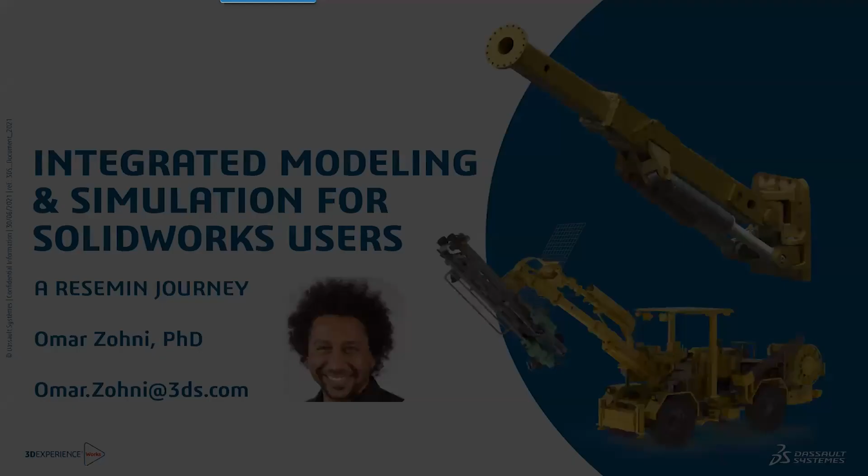Okay, so the company that we're going to talk about is called Resemin. What we're going to start with is I'm going to talk a little bit about Resemin, what their struggles were, how they were currently using simulation. I'll talk a little bit about Resemin and their adoption of the 3D experience platform, why they adopted it, what they thought was important, and then the journey of getting them onto the platform and using it. Then we'll wrap up with any Q&A or some calls to action.

So Resemin is a company that started in 1989. They are based in South America, actually in Peru. Their niche, their specialty, is basically underground mining, specifically they wanted to make compact underground mining vehicles that were affordable. So you can see now they're in over 17 countries. They make a handful of products. They're quite successful. So let's talk a little bit more about the company.

So again, they started in 1989. Their first product that they launched was this product called the Raptor. It was a real milestone for them. It was a very affordable solution for many underground mining companies, right? So that was back in 2001. They first sold the Raptor to Zambia, in Africa. They entered the South American market in Chile.

They created what's called this bolter tool, which can actually cut through rocks and bolts, so the small bolter 99 and the bolter 99 were really national inside of Peru, as well as international hits for them. So they started doing these drilling rigs. They entered the Mexican market. They really started to consolidate in the African market.

I'm not going to talk through all of these, but Muki was another real game changer for them because it was the smallest underground mining rig at the time—I think it actually might still be. The Muki actually spread to 5 different continents. So they started to get a real worldwide audience and a worldwide customer base, right?

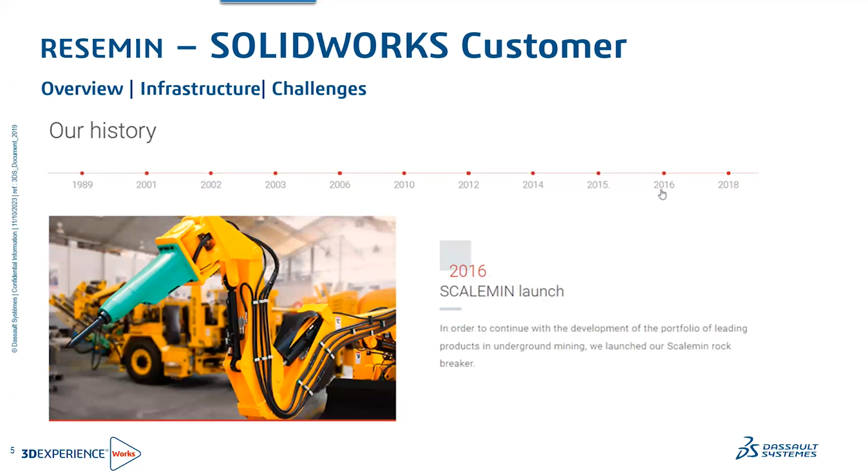South Africa. This Scalemin is a product that we're actually going to be looking at a little bit. They actually entered the Russian market in 2018. I know Russia's a bit tricky to discuss right now, but back in 2018, it wasn't. Hopefully this video is coming through for you guys.

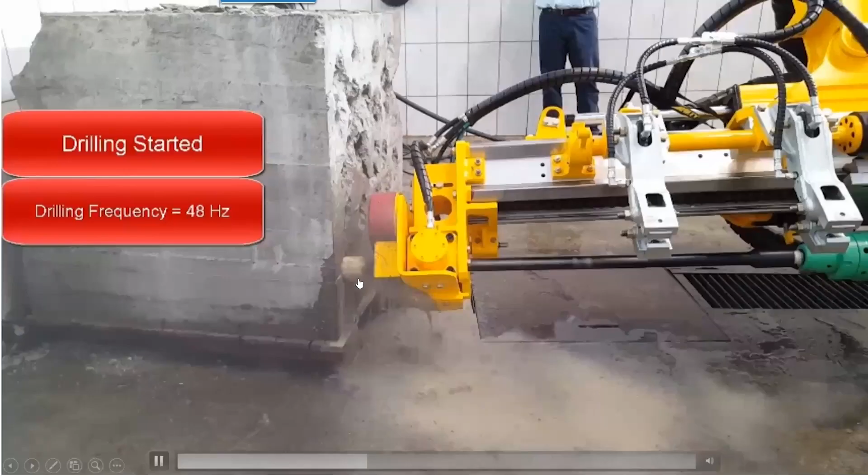So you can see this is that last product that we talked about, right? So you can see drilling through rock from an analysis standpoint. This is a pretty complicated problem, right? You have vibration concerns, you have significant loads—it's a very large load. You have vibration concerns, you have cooling concerns. You can see there's a whole bunch of fluid that's flowing through here in order to keep the tooltip cool.

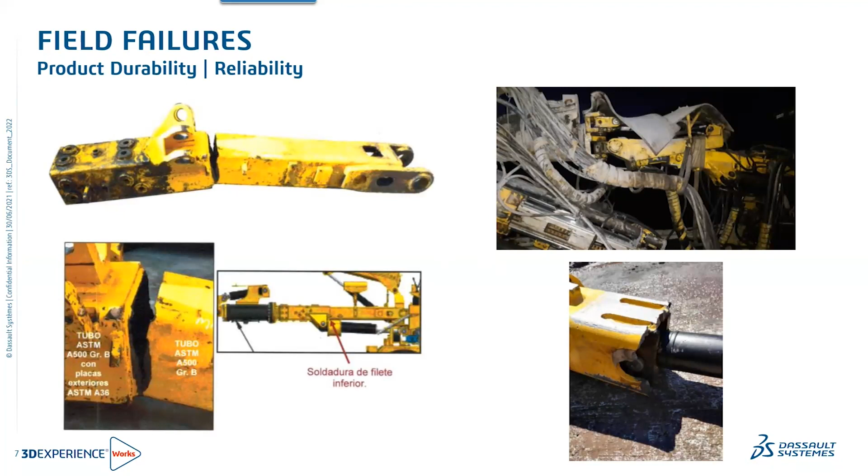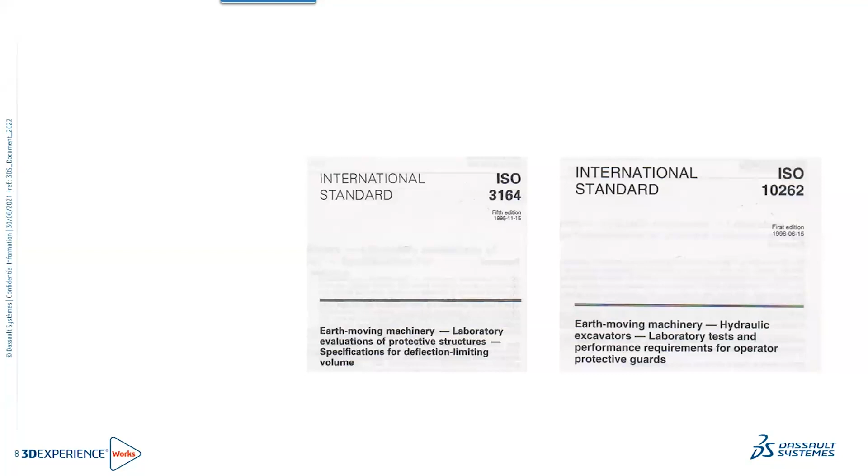Relatively simple kind of geometry, but a pretty complicated type of analysis, based on the criteria and the needs for this specific company. So what Resemin was seeing was a lot of field failures after they built their products. They had a real reliability issue—they were getting all of these cracks after utilization and after pretty low cycle utilization. It wasn't like the thing had been in the field for 5 or 10 years; it started to fail pretty early on. That was one issue they were very concerned about, those field failures, and I'll talk a little bit about why they were concerned about those field failures in a couple slides.

They also had a couple industry standards, and depending on the country you're in, the standard could be a little different. So they had what's called falling object protection - this is the roof of a vehicle, and someone is sitting underneath here. Different countries have different criteria for the falling object: the height it could be falling from, as well as the amount of energy that falling object could impart on the roof.

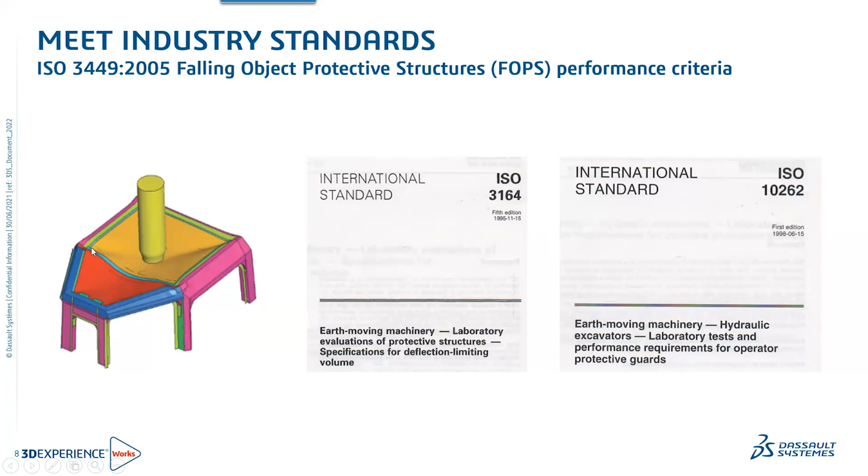They also had something called rollover protection, which is basically the vehicle being hit from the side and protecting the user. Obviously there's going to be somebody sitting inside this canopy, and you want to make sure they're safe.

So when we first started talking to Resemin, this is what they told us - this was kind of their current configuration at the time. They had about 20 Solidworks licenses that they were doing their CAD design with. Resemin was a really strong Solidworks customer; they had been using us since basically their introduction. So 20 users doing CAD design.

They had a couple users that were using SolidWorks simulation for really basic structural analysis, linear dynamics, like frequency analysis. And then they had a third-party tool that they were using for complex analysis - more advanced fatigue, multi-body dynamics. So they were either using that third-party tool or they were contracting that work out.

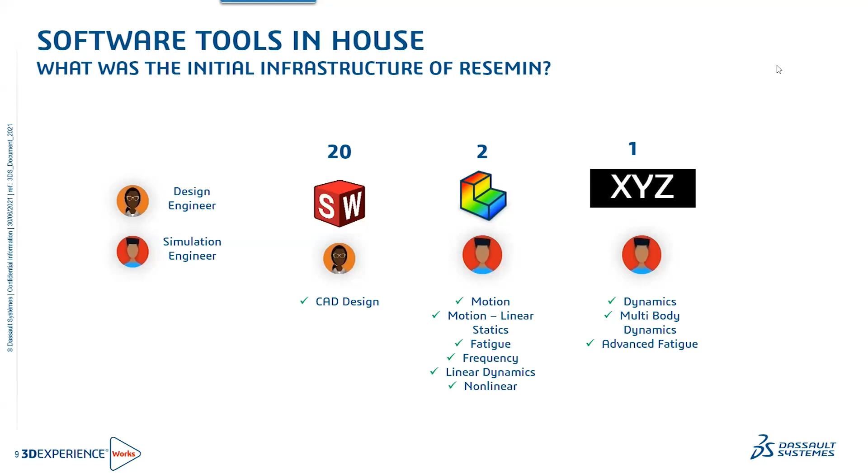Now, in addition to that, they also had two different kinds of product development cycles. One of their development cycles would be for new products. They would design it, they would simulate it, then they would manufacture, and they were seeing that they were building about 10 prototypes a year, and each prototype was taking about a month. So that was when they had new product launches, and there wasn't a lot of simulation really driving the design process.

So everybody was kind of working in a separate bucket. The designers would come up with the design, they would simulate it. If they saw some glaring problems, they might kick it back to the designer. But this wasn't really a seamless and bi-directional process where simulation was kind of driving their design. So there were a lot of prototypes that they built that were just not good designs, because they weren't doing enough simulation, and they realized that.

They also had an aftermarket process. So they would manufacture a design, then there would be a field failure. They would do some very advanced simulation, either in-house using that third-party tool, or they would consult it out. Then they would do a redesign, and then they would manufacture the redesign.

Now, here's the thing Resemin did that I don't know a lot of other companies do. First, they would send a designer out into the field to try to figure out and rectify what the problem was. But they would reimburse the company for the time they lost revenue for not being able to use the tool. So they had to turn these around really quickly because Resemin was paying. You can imagine for a company, there are huge costs associated with reimbursing a customer for not being able to use the tool - warranty costs, and having to figure out exactly why that thing is failing in a very short time.

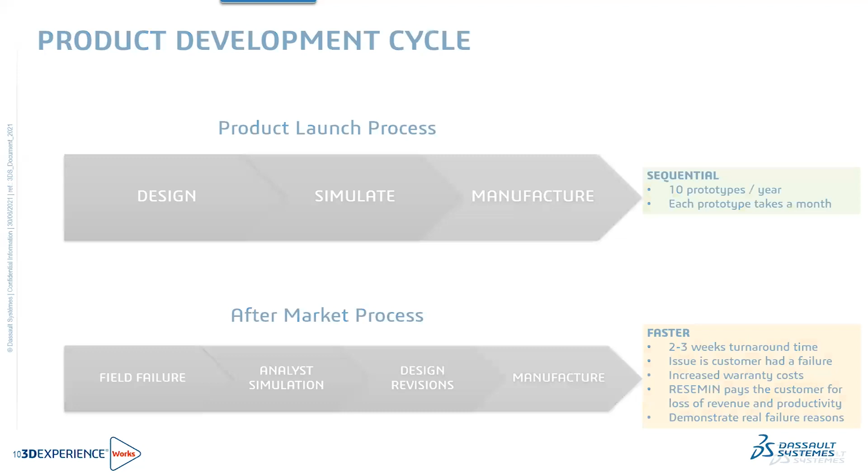So that's kind of where they were, and that's when they reached out to us and were talking to us. They're, again, a really close customer of ours. They were talking to us about some of their challenges, so we decided to talk a little bit with them about the 3D Experience platform.

Now, I know you guys are probably exhausted of hearing about the 3D Experience platform. I'm going to give a real brief summary about how I think about it. I'm not going to spend a lot of time here.

Dassault Systèmes is basically a conglomeration or a group of a bunch of different brands. Everybody knows SolidWorks, that's one of the brands. CATIA is another brand. Simulia is the brand that's responsible for developing all of the analysis tools that Dassault Systèmes has, including Abaqus, including SolidWorks simulation. Actually, the Abaqus developers are now responsible for developing SolidWorks simulation.

The 3D Experience platform basically brings together the best of all of the brands at Dassault Systèmes into one workbench, or one platform, that you can start leveraging some of these different brands.

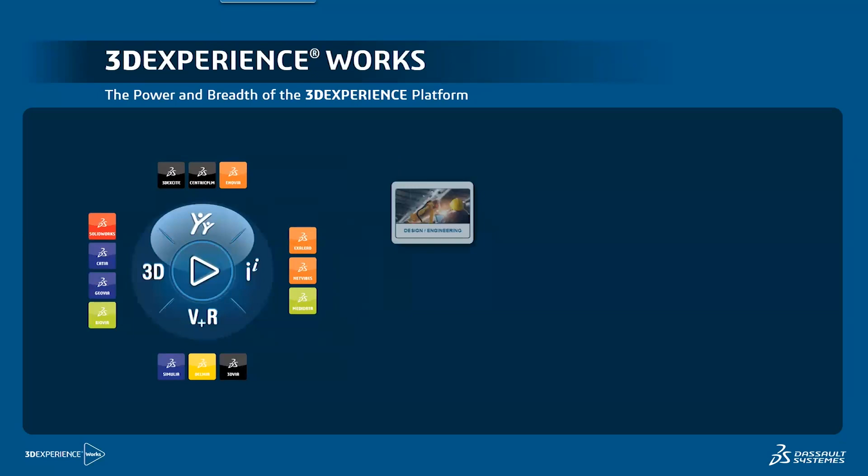So the way I think about it, and this is a very simplistic way, is everybody uses an iPhone, or everybody at least knows how an iPhone works. The iPhone operating system is kind of similar to the 3D Experience platform. And then depending on what you want to do, you have different apps that you can add to the iPhone, your iOS. That's kind of how the 3D Experience platform works.

Now, there are apps for design and engineering and simulation, which is the space that I play in most. There's also stuff for marketing and sales, product management. There's a PLM that's kind of built in. There's stuff for governance, and there's stuff for manufacturing and production via the Delmia brand. But what we're going to focus on is design, engineering and simulation, and that's the venture between the SolidWorks brand and the Simulia brand.

If you guys have not heard of Simulia, Simulia is the brand responsible for all of the simulation tools that are developed by Dassault Systèmes.

So I'll give you guys a little bit of background. I don't like talking about myself because this is not about me, but I did my undergrad at the University of Pittsburgh, which happens to be where ANSYS is based. So I co-op with ANSYS, and then after I finished my PhD, I actually went to work for ANSYS for a little bit.

When I transitioned over to SolidWorks, one of the things that was frustrating for me was there are a lot of problems at SolidWorks, and SolidWorks simulation is a great tool, but there are a lot of problems where it hits its limits. The nice thing now about starting to work with Abaqus and the Simulia brand is across different physics, there's very few types of analyses that the Simulia brand is not able to solve.

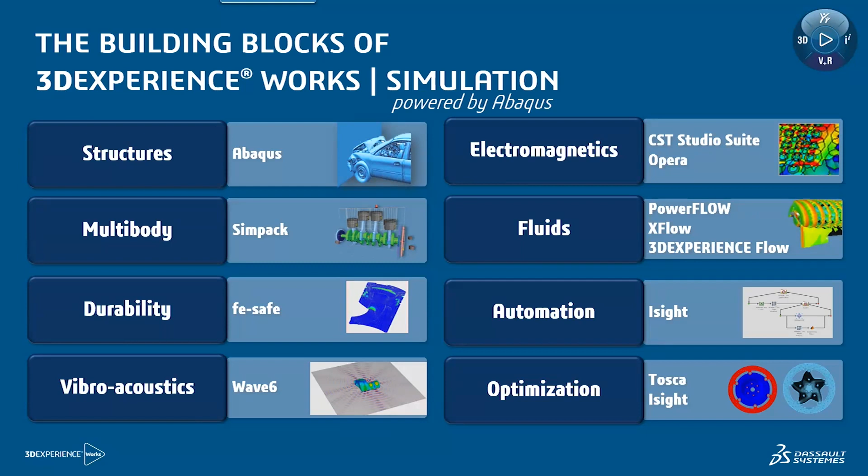So now with the 3D Experience platform and a lot of the things that are going on with 3D Experience Works and the simulation tools on the 3D Experience platform, it's a really exciting time to be a SolidWorks user because you're going to be able to be exposed to a lot of these different tools all inside the Dassault family, all under the Dassault umbrella.

So again, a little bit about the 3D Experience platform. I know you guys are exhausted of it, but some of the things that I think are important, especially for simulation users, it's integrated with SolidWorks. We realize that SolidWorks is kind of the sun that everything else revolves around. So if we can't effectively leverage your SolidWorks geometry, no solution that we provide is going to be useful for you. So it's integrated.

It's also scalable. So whether you're doing very, very basic, simple linear analysis all the way up to explicit dynamics or damage modeling or cohesive zone modeling, there is a solution for you.

It's on the cloud. So if you want to leverage high performance computing right out of the box, you can run most of the tools on at least 8 cores. That's local or on the cloud, but there are ways that you can scale up and run on 18, 36, all the way up to, I think, 288 cores if you've got really, really complicated electromagnetics or computational fluid dynamics problems. So it's on cloud and scalable, and it's got that SolidWorks DNA.

So it does have an assistant panel that kind of guides you through an analysis. We realize a lot of our SolidWorks users are not doing analysis every day, so whatever tools we give them, the learning curve has to be not very painful.

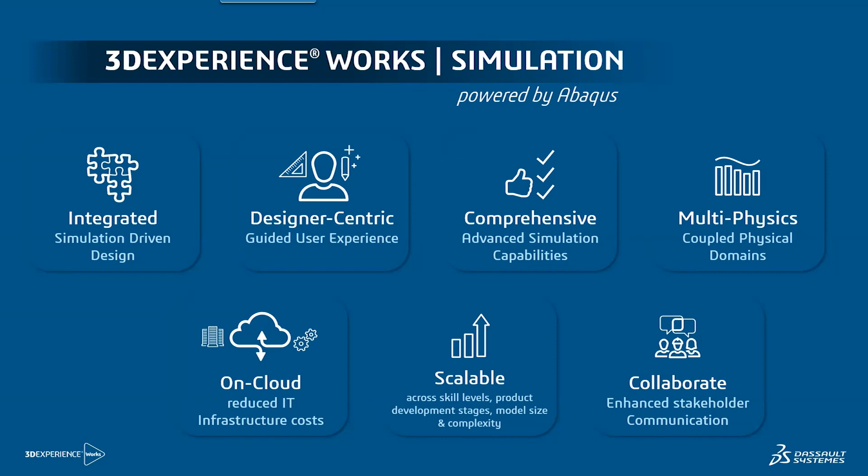We're going to talk mostly about Abaqus today, and the Abaqus solver. So just a brief description of what Abaqus is. Hopefully you guys have heard of it.

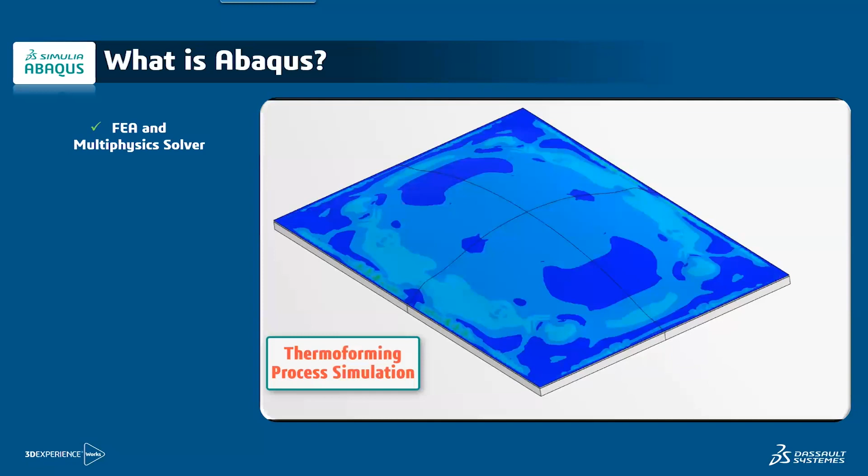Abaqus - and again, I came from ANSYS, so my job here is never to talk down about the competition - but Abaqus is kind of a best-in-class finite element analysis solver as well as multi-physics solver. It has capabilities for smooth particle hydrodynamics, acoustics, piezoelectric, piezoresistive, and thermal analysis. Where Abaqus really shines is complicated material models as well as ill-conditioned contact problems.

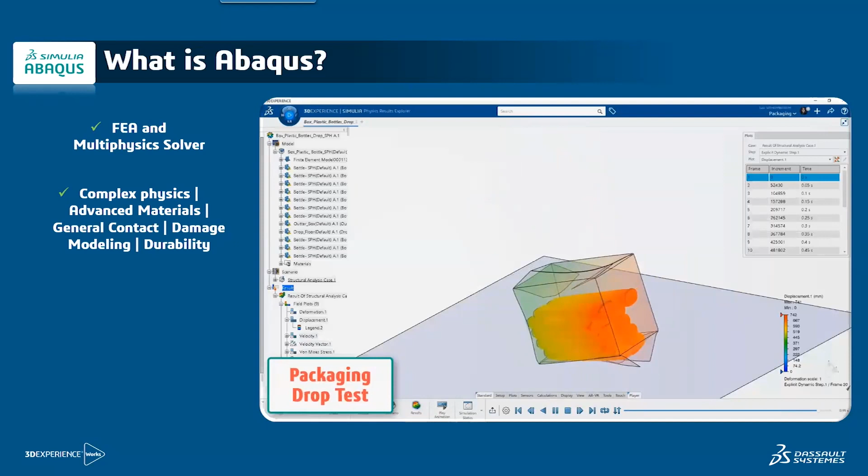So the situations where you're not exactly sure what faces are going to be coming into contact with other faces during an analysis - it does a really great job of leveraging high performance computing.

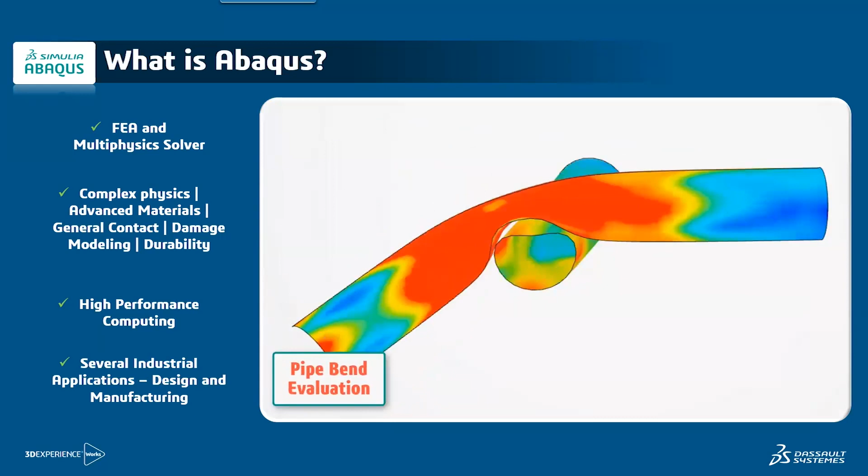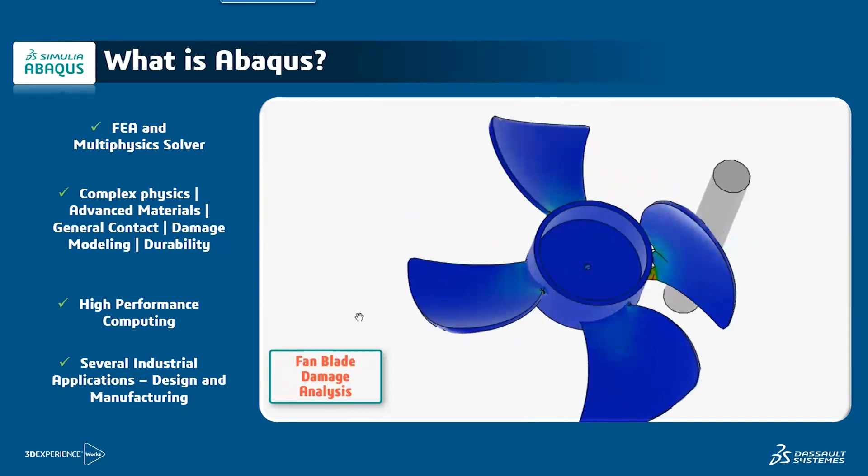And obviously it's used across several different industries. I know when I worked at ANSYS, some of the industries that - I've been at SolidWorks now for almost 15 years, or Dassault for almost 15 years.

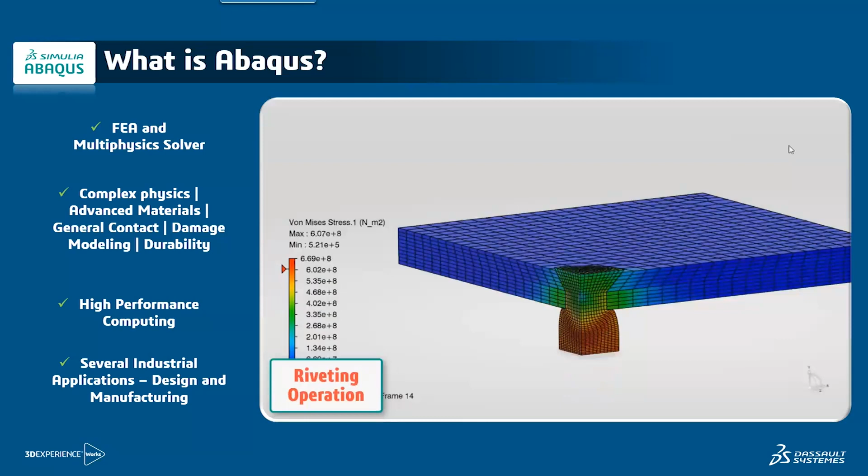The first 12, 13 years, I was focused on SolidWorks simulation. The last few years, it's been on 3D Experience Works and the products from Simulia. But Abaqus is really well respected in the automotive and transportation industry, aerospace because of the CATIA product, as well as in the bio space. A lot of medical device companies are also really standardized on it.

All right, now let's transition over and talk really specifically about Resemin and what they wanted to do. So Resemin, again, they realized that their really high level analysis was not being done by SolidWorks - they were either using a third-party tool or using a consultant.

They really felt like it was disjointed. And again, they're on multiple continents, so they felt like it was difficult for them to be able to collaborate across all those different continents. They had people out in the field that they wanted to be able to collaborate with. So they realized that there was kind of a bottleneck in their design and analysis process or workflow.

So they said, look, we have three basic use cases. One, we would like all of our designers to be able to do really basic, simple linear static analysis, leverage design changes in SolidWorks, and be able to optimize their design.

They also had some second level engineering simulation that might be more advanced contact, multi-step analysis, fatigue analysis. But these top two were things that they felt like they could do adequately, or at least could do with SolidWorks simulation.

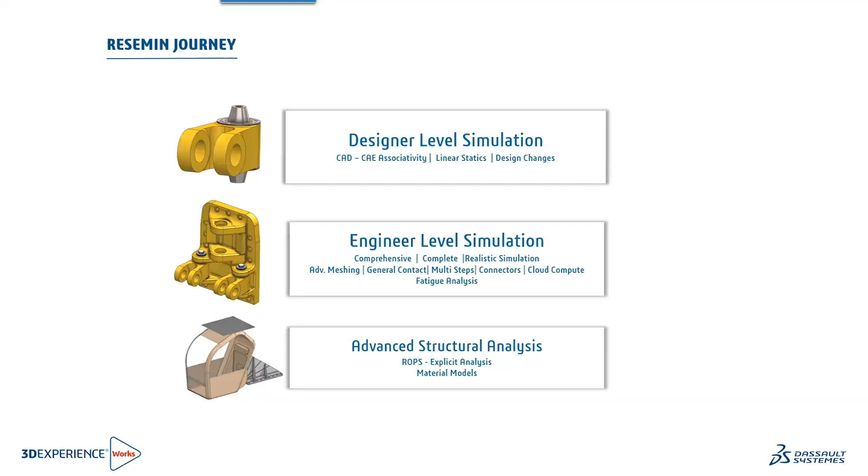So they said, look, we're going to give you this Resemin bolter. They actually gave us the full assembly. We want you to focus on the arm here, the boom arm, or the boom bracket. And we would like you to look at this for the first two levels of analysis.

So for the designer focus, they wanted us to look at the knuckle joint, run some basic analysis, do some design iterations, and come up with an optimal design - or at least show how designers could leverage SolidWorks as well as the 3D Experience platform, making design changes in SolidWorks that get reflected on the platform. For their engineering, their second level analysis, they wanted to do fatigue. This is a multi-step analysis, and they wanted to look at the whole bracket.

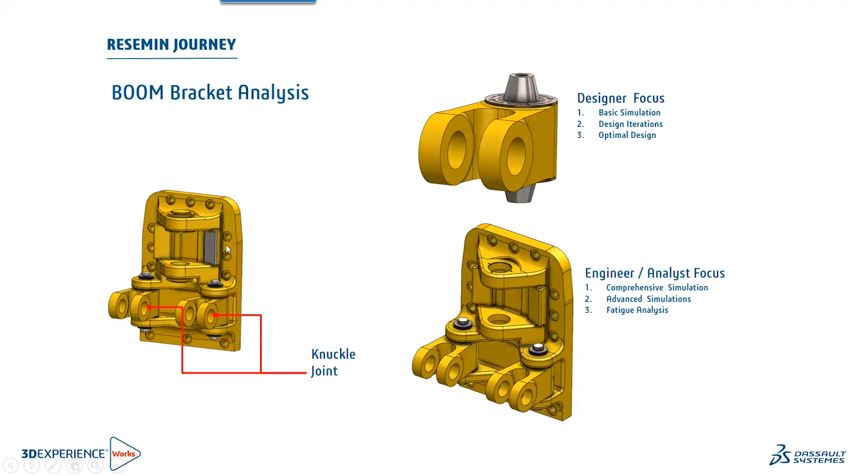So let's start there and take a look at how that would work inside of SolidWorks. So here we are sitting inside of SolidWorks.

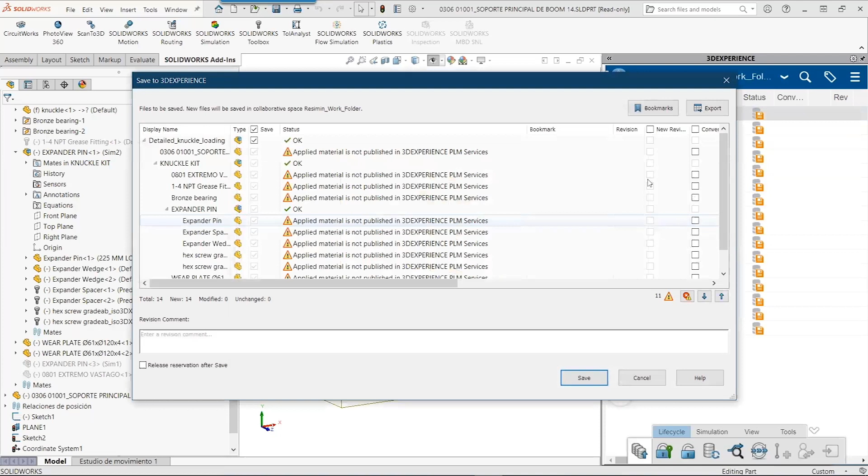I don't know if you guys have seen the 3D Experience platform before, but depending on what tools you have, now with SolidWorks Cloud Services, everybody should have this. There'll be a 3D Experience add-in that basically allows you to save your geometry to the platform. Now, this is I think a release back, so it looks a little different, but basically the same. All this is doing is saving your geometry up into the cloud, inside your collaborative space, which is basically your folder on the 3D Experience platform.

Now it's saving it up there, but it is still linked to your native SolidWorks geometry. So if you make a change in SolidWorks, it's going to flag the geometry on the platform. There's also a way to just save directly to the platform, but if you're still working in the traditional sense, the way most SolidWorks users do, working locally on your desktop, if you save it up to the platform, it's going to tell you if you've made a change on your desktop. It's still linked, it's not a dumb geometry sitting up on the platform.

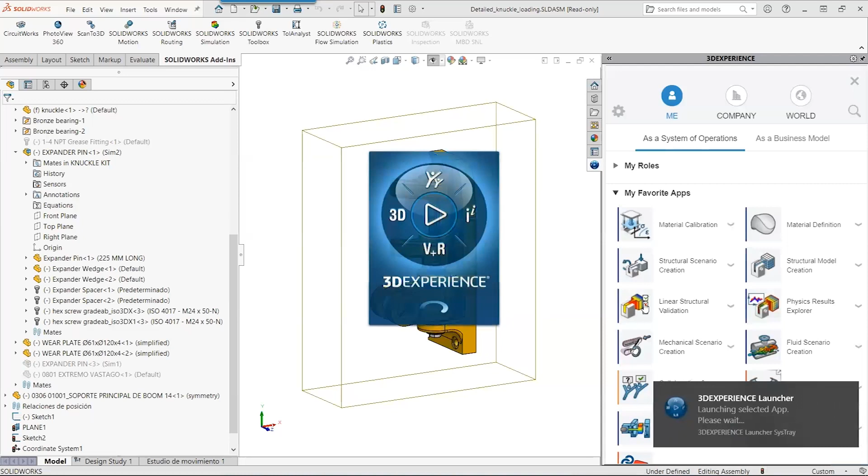So again, their first analysis was linear static analysis. We'll talk a little bit about the different roles that are available, but they wanted to run linear structural analysis. So I've saved my model up to the platform, and now I'm saying I want to start the linear structural validation app.

Okay, so, somebody have a question? No? Okay, so.

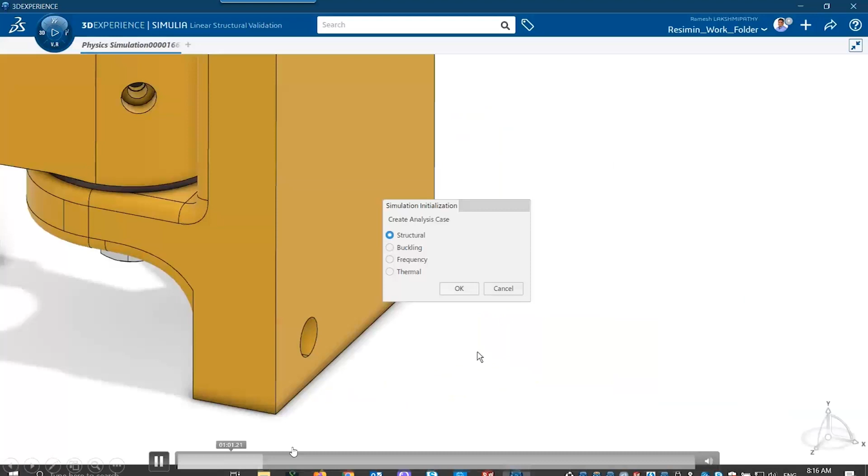Now it's just opening the linear structural validation app. The first thing it's going to do, again this is the very basic tool, is ask you - there are only really 4 analyses you could do: structural, thermal, buckling, and frequency. Like I mentioned, there's a really nice assistant panel, kind of like the one in SolidWorks simulation, that walks you through the steps required to run your analysis.

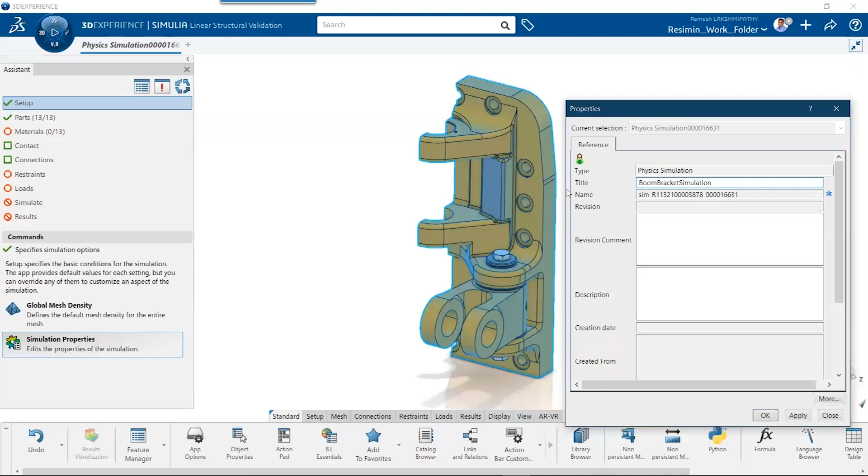So you can see what I've done here is I've only imported half. A lot of times when people run analysis, they'll create a configuration for analysis, and in this case there was a configuration that just had half of the model.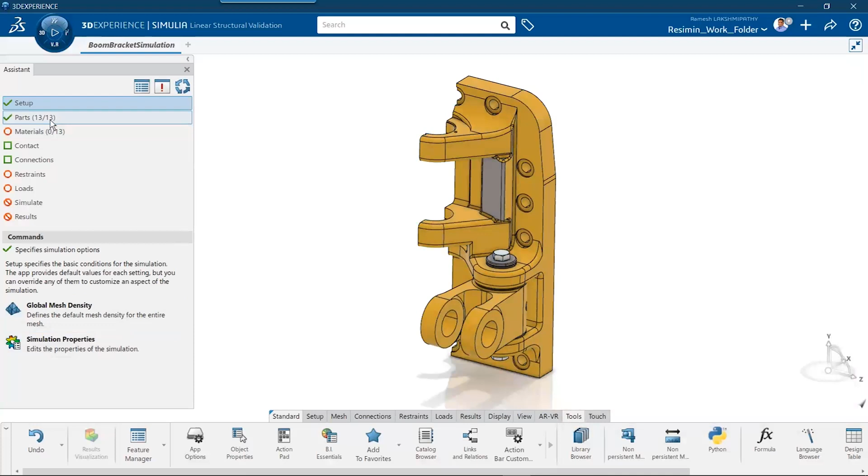So what I'm doing here, again this is the very basic tool, it doesn't have all of the bells and whistles of the advanced tool. I'm setting a basic mesh size, and again this is the first level analysis, so I'm going to tell it what parts I want to include.

So I'm going to turn off, basically say this other geometry that I'm unchecking is not included in the analysis. For this simple analysis, I don't want to include that whole bracket, I just want to look at that real small knuckle section. So you can see I've compressed it down to just those 6 parts.

Just like SolidWorks, there's a material library that you can import that comes with the software, with a really nice list of predefined material properties. Obviously you can create your own material properties. I'm just going to specify that I want all of this to be ASTM A36, and I will apply that to all of the materials.

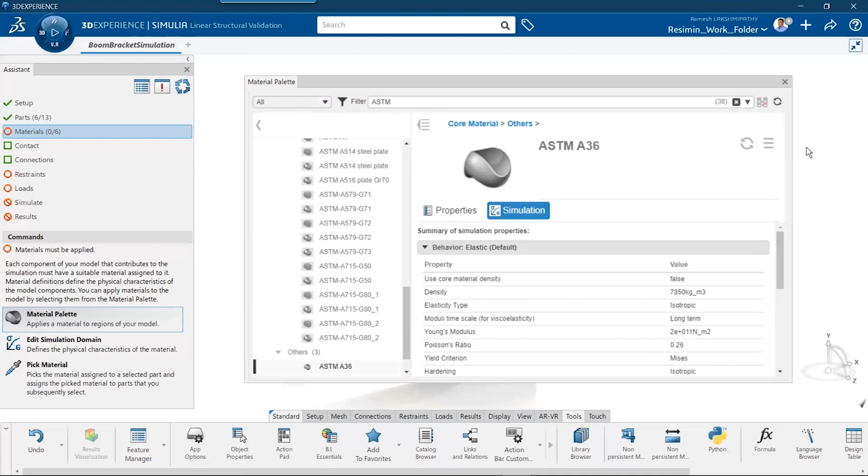Again, just linear analysis here, so we're not running any nonlinear in this case. So I've just applied that material to the whole assembly, or this whole sub-assembly. And you can see, as we're walking through here completing these steps in the assistant panel, we're getting those green check marks telling us you've completed this step.

Now I just want to point this out - Abaqus handles contact, or general contact, a little bit differently than SolidWorks and some of the other players in the field. Abaqus and the platform make the assumption that everything is a no penetration contact. So when you read in an assembly, if you're running linear analysis, it doesn't know that faces that are touching should be bonded.

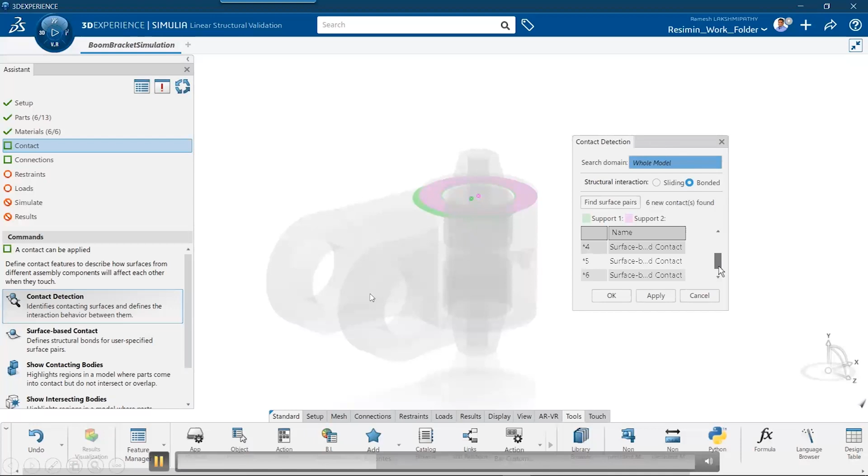So what there is, with one step, is basically a contact detection tool where I can come in here and say I want you to look at the whole model, find any faces that are touching, and create a bonded contact pair. You can see it does that for these 6 faces that are touching. So what I've done is I've said those 6 faces are bonded contacts.

And now I'm going to go again, just walking through the assistant. I'm going to specify my restraints.

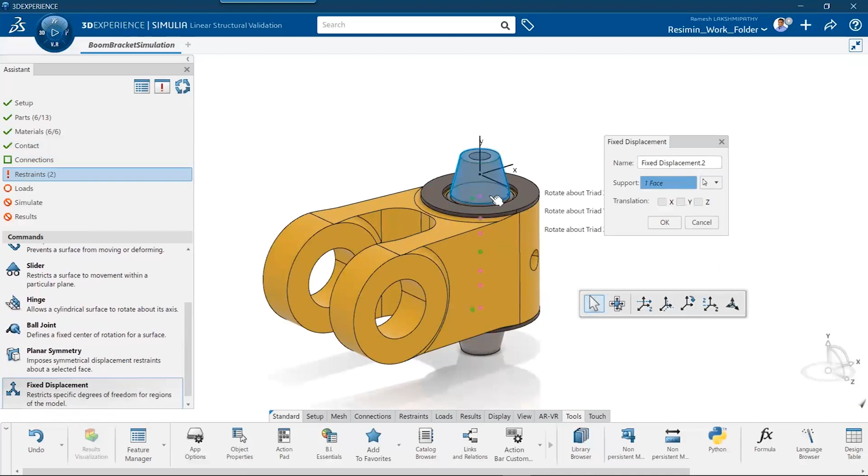For this particular model, those flat cylindrical top and bottom faces on those washers, I'm going to say they can't move in the Y direction, so they can't move up and down. And then for those conical faces, I'm going to say they can't move in the X and Z direction, which you guys can see down at the bottom.

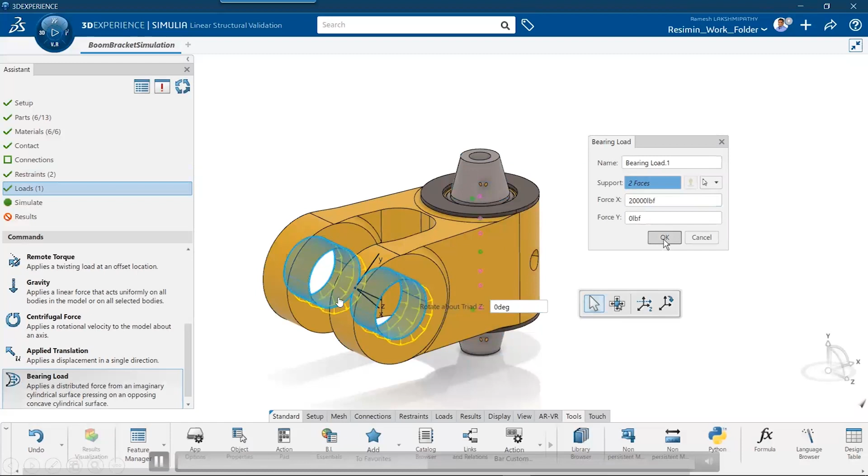Now I'm just going to apply my load. So I'm going to take those 2 cylindrical faces. I can orient the direction, so depending on the orientation of the load, I can rotate that triad. You can see it rotated that local triad that got created. And I'm saying that I want the load to be 20,000 pounds, that bearing load.

That's really all I need to do for this particular model, for this linear analysis case. So I can go ahead and simulate that. I have the option to run it locally or on the cloud.

With small models like this, I suggest that you would run it locally. I typically only leverage the cloud if I've got a really, really bad or slow computer that just doesn't have computational resources, which is so rare right now. Everybody's got at least a relatively good computer.

But if you want to, you can leverage the cloud. The nice thing about leveraging the cloud is you're utilizing the Simulia cloud, which Simulia is constantly upgrading and building those cloud resources, really tweaked to running analysis. We all know once we buy a computer, within 6 months there's something better out there. So by utilizing the cloud, you're ensuring that you're using best-in-class resources for running analysis.

Now again, this is just the simple linear analysis case, so it doesn't have all the post-processing or pre-processing capabilities of the tools that we're going to show next. But you can see it's got a very nice, simple pull-down display we can walk through.

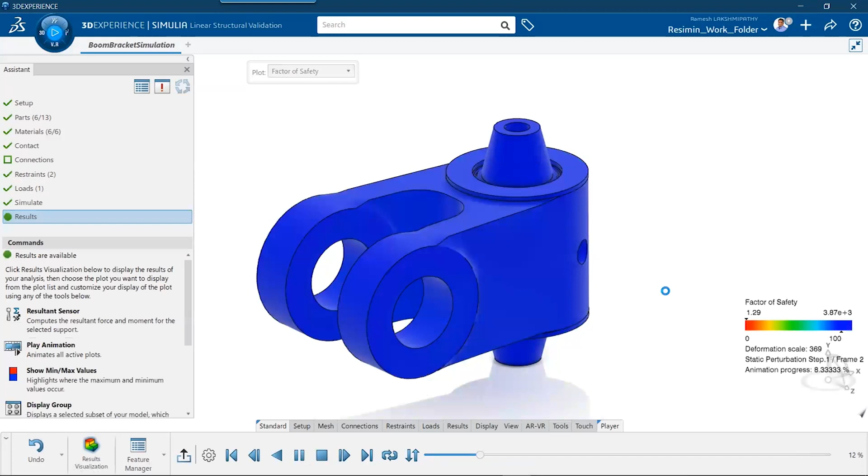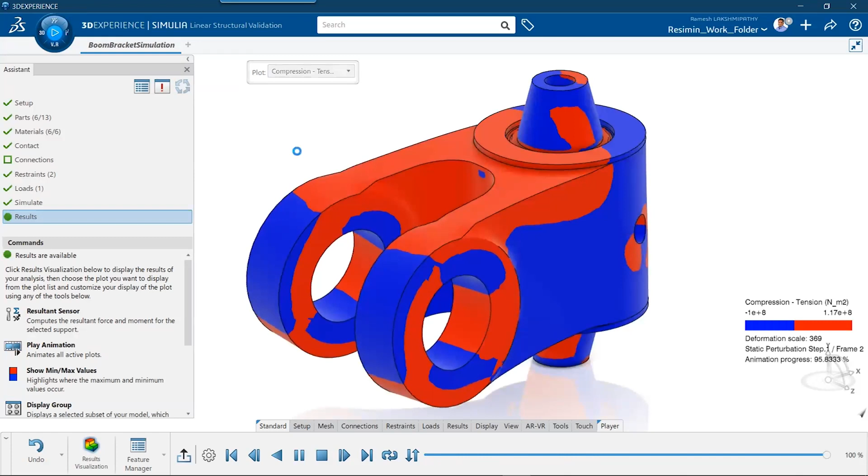So we can see we're looking at factor of safety here. The minimum factor of safety is about 1.29. We could take a look at things like displacement vectors, von Mises stresses, reaction force vectors, so we can see the reaction forces for this case. A plot I like to look at sometimes is the compression tension, which shows you areas of the model that are in compression, areas that are in tension, and principal stress directions.

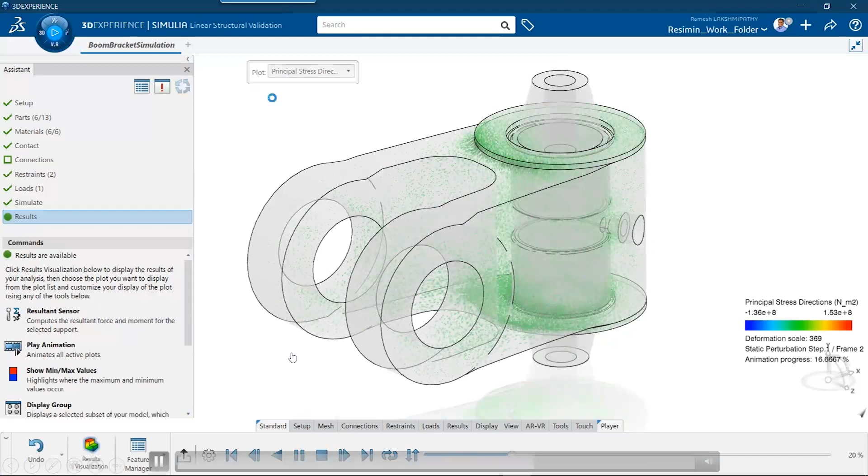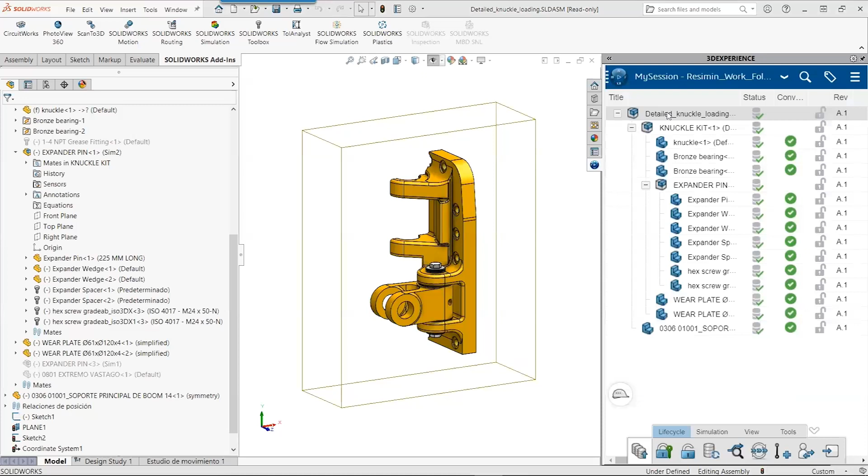But this is just one simple analysis, right? It's like this is something they could have very easily done inside a SolidWorks simulation. So what did they actually want to do? They wanted to be able to make sure that all of their designers could run the analysis, but could also go back into SolidWorks after running the analysis, make design changes, and ensure that those design changes were reflected on the platform. They didn't want to have to reset up the model and do any redundant steps.

So you guys can see that area of curvature in the back part of the knuckle had a factor of safety that was about 6. So again, we wanted to highlight how they could make changes very, very quickly.

So you can see we're back in SolidWorks now. What we're going to do is change that radius of curvature for the fillet from 30 down to 10 millimeters. We're also going to change the thickness from 30, I think down to maybe 20.

And with the push of a button, I can re-upload the model. I could also add revisioning. One of the things that's natively built into the platform is revision controls.

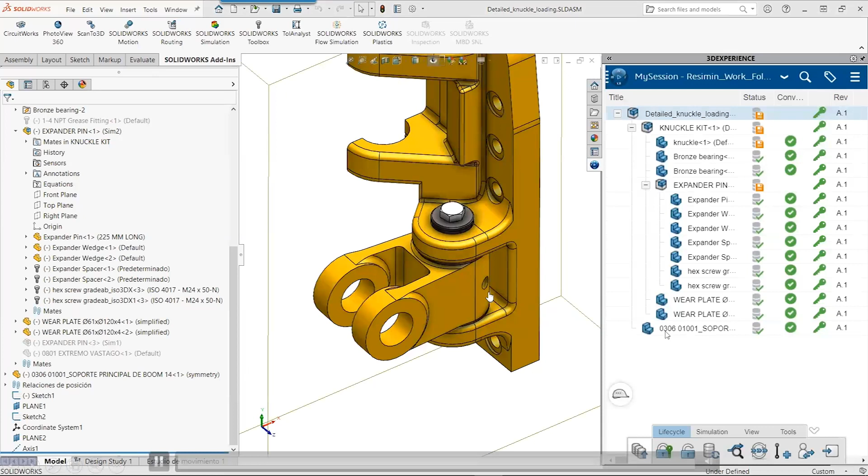So ENOVIA, which is the PLM product developed by Dassault Systèmes, is kind of working in the background. You could do major and minor revisions if you wanted to. In this case, I think we're going to make the assumption that we're still working with the A.1 revision. We're not actually creating a new revision, but if you wanted to, you certainly could. And we're going to update.

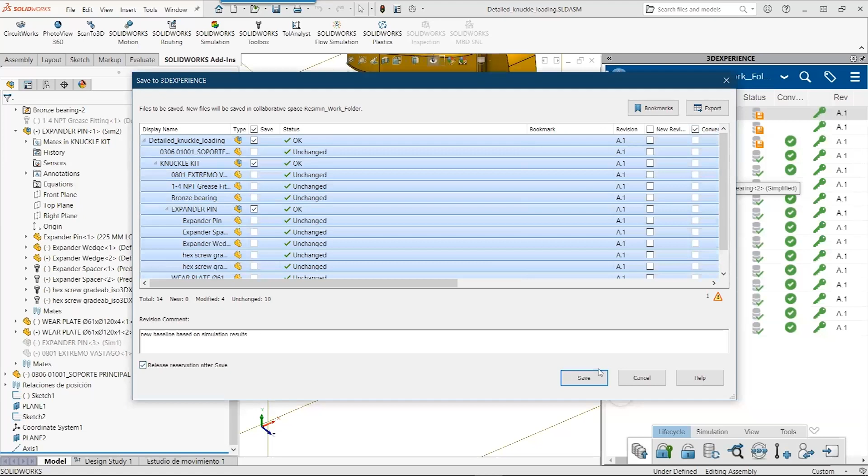We can also add comments. Again, I'm an engineer, so I understand we kind of hate documenting our work sometimes, or it's something we think we'll do later and never do. It's very, very easy to add comments so that somebody else looking at your work, whether it's your boss, the designer, or the product manager, can see exactly what you're doing.

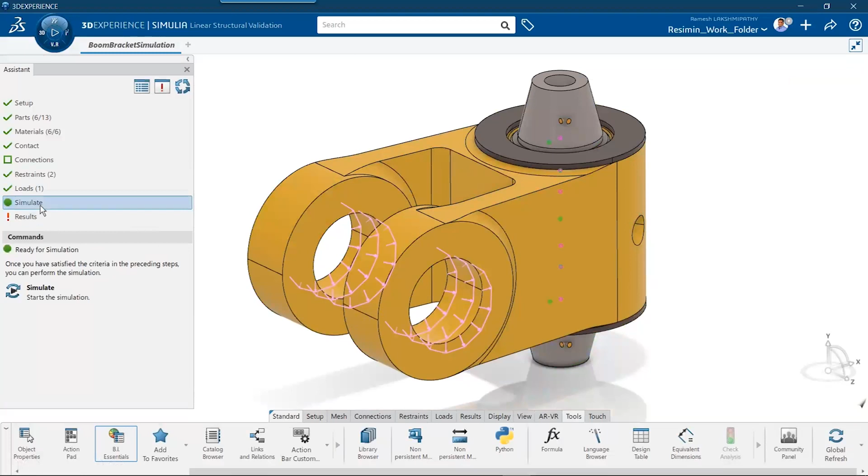So we can make that update. Once we make the update, with a push of a button, we can refresh this. Just keep your eyes focused up here, where we made those design changes. You can see it automatically updates. And again, with the push of a button, it's telling us the results are out of date. We can go ahead and rerun it and evaluate the changes. We can even keep the initial analysis so that we can compare them in the future.

So we showed that to them. They were very happy. Again, this is something that they were kind of already doing inside of SolidWorks, though, right? So this at least gave them a little bit of comfort that they were getting the same capabilities that they had inside of SolidWorks.

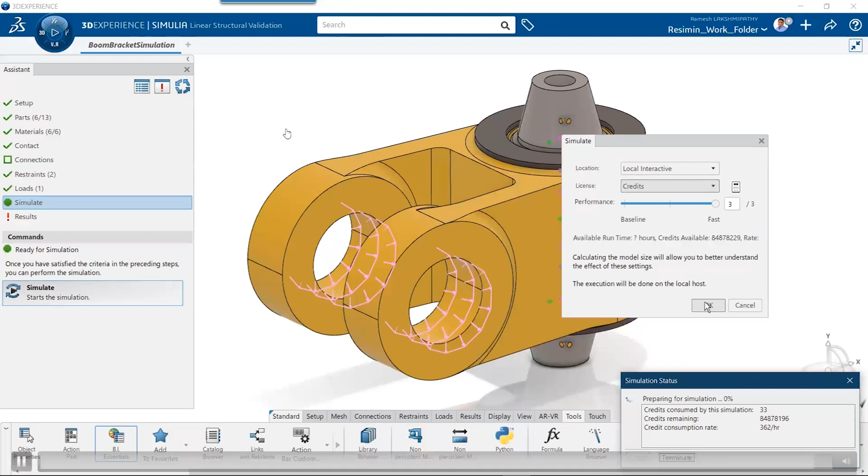So, no problem, let me keep going here. All right, so they were happy with that. Now they said, alright, let's talk a little bit about some engineer level simulations, a little bit more advanced. And this was very important to them because they were seeing a lot of field failures that they thought were associated with fatigue.

So here's the model inside the platform. Now, we uploaded this model initially, we had this whole model uploaded. For the designer level simulation, we just focused in here on the knuckle.

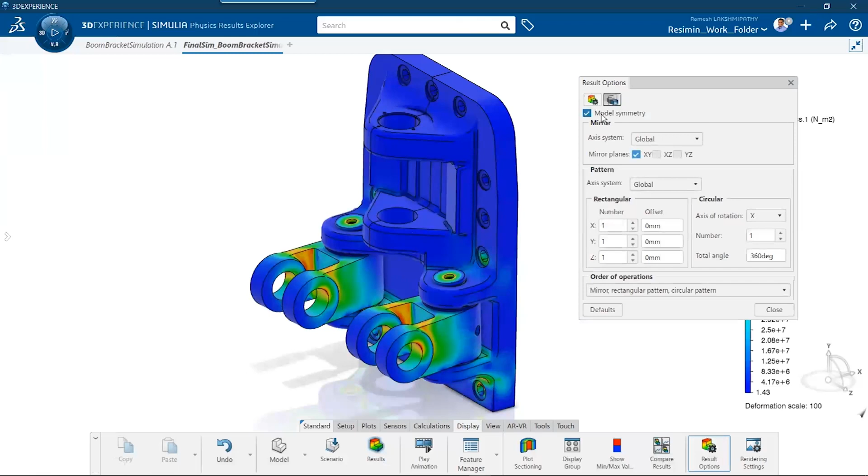Now I'm utilizing a little analysis trick here. There was a configuration created that was only half of it, so I'm utilizing symmetry. Now I know a lot of people don't like to utilize symmetry because they have to explain it to their boss, and a lot of times bosses are like, why am I only looking at half the model? But symmetry is, there's actually a way to show the full results if you do model symmetry. And it doesn't have to be half symmetry, it can be quarter symmetry, 1/8 symmetry, 1/16 symmetry. So if you've got a boss who doesn't understand symmetry, there's certainly a way to show the results.

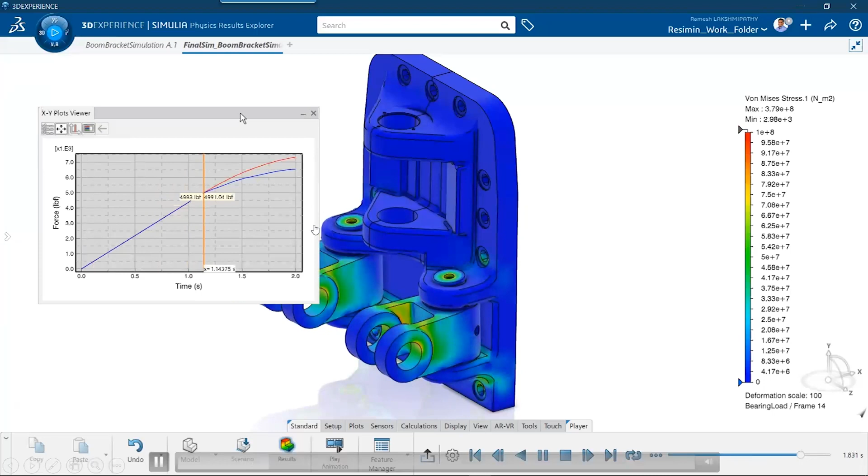So let's talk a little bit about this particular analysis. So this is the boom bracket. What we're showing here is the force versus time. This is actually a two-step analysis. So we're not running this as a transient analysis, but when you run nonlinear analysis, time kind of is pseudo time. So typically what people do when they run nonlinear analysis, if you're applying one load or one load case, what a time of one typically means is that at time one you've applied 100% of the load. So time kind of acts as a marker to scale up the load application. And that's typically how it works.

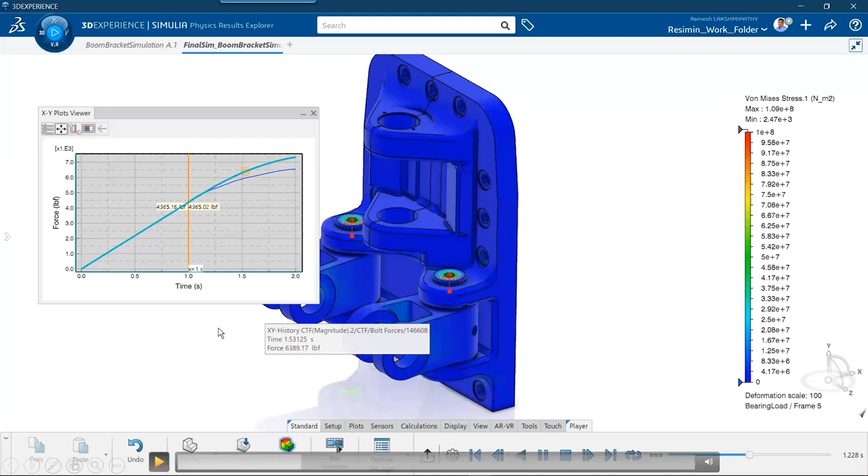There are certainly different ways. Sometimes, let's say you're applying a 100-pound load, people will say, well, then I want that to run to a time of 100 seconds, pseudo seconds. That way, each second kind of reflects 1 pound of load. It's just that time represents scaling of your load. And then if you have multiple load cases, which is what we do here, time one is the end of the first load, which I think is the bolt pretension. And then time two is the end of the second load, which is where you're locking down the bolts and applying the external load. So lots of different ways to run analysis, but that's how we're running it in this case. Utilizing each load step as being 1 second in pseudo time is typically what people do. But again, if you ask a dozen engineers, you might get half a dozen different answers about how they handle nonlinear analysis.

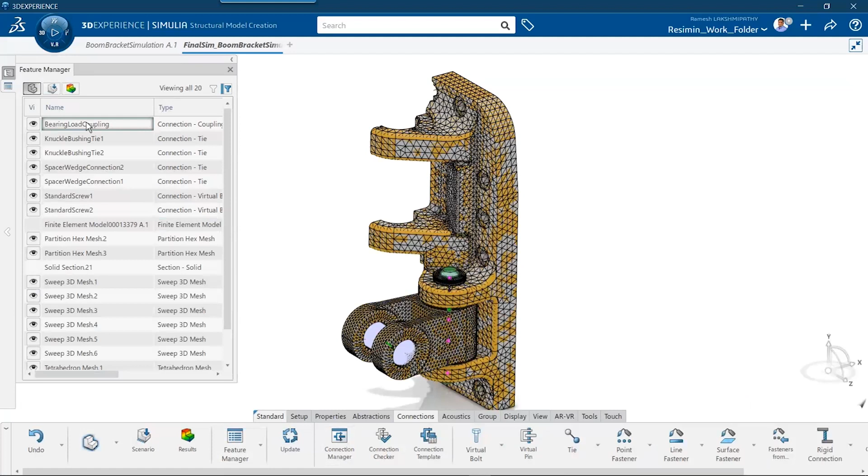So another thing I want to point out here is we're utilizing different mesh. It's kind of hard to see here, but for the washers down here, we're actually utilizing a brick mesh, which is something you could not do in SolidWorks.

We're also utilizing a screw or a bolt, a virtual bolt, and virtual pins here in the analysis. Lots of different bells and whistles are available to make this very easy for designers to take advantage of. You can see for this section, we're actually using a brick mesh, something we could not do in SolidWorks, where you're forced to use a tet mesh. The reason this is transparent here is because this is actually a virtual bolt or pin. In this case, I think this is the bolt. So you've got the ability to do virtual bolts just like you do inside of SolidWorks.

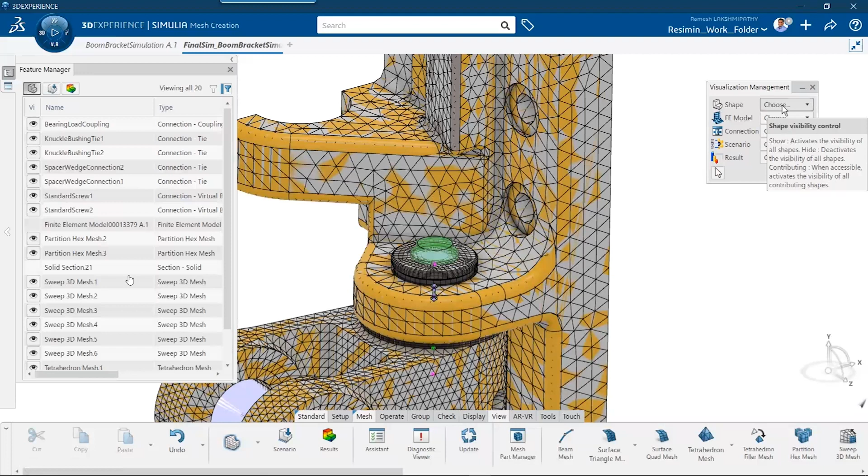The other thing that's available is there are different element formulations. So if you're running hyperelastic materials, there are certain element formulations that are better for hyperelastic materials. Again, we're really leveraging the power of the Abaqus solver here, with a much more modern user interface. You can see different mesh sizes for each of these.

I'm utilizing general contact. I pointed this out before. The nice thing about general contact is I don't have to specify contact pairs for my no-penetration contact. I can just turn on general contact, and the assumption is any faces, whether they're touching or not touching, are considered no-penetration contact unless I override it. So this is kind of the default, unless I say, hey, these faces are bonded or specify some other contact pair.

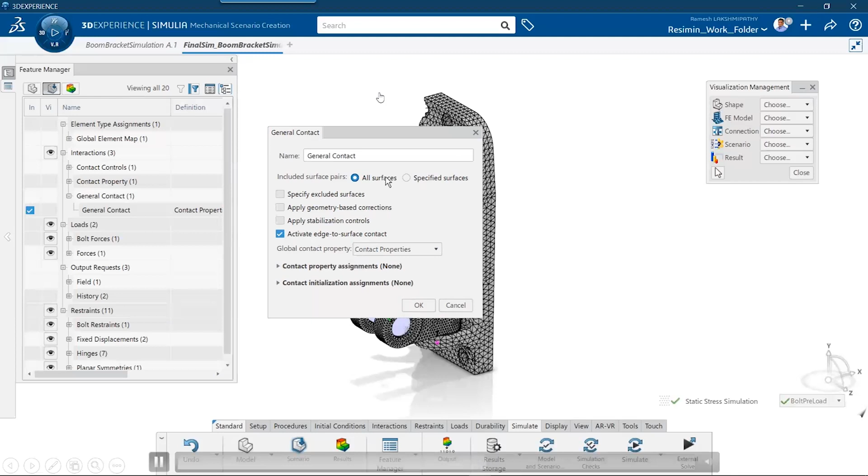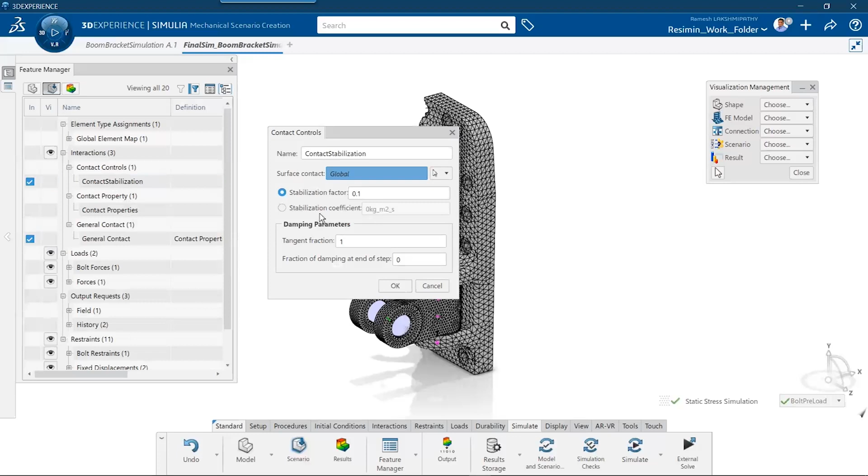So I'm utilizing general contact. I don't need to specify any contact pairs. I'm specifying a contact property here, which controls the friction coefficient for these faces. Now, if you had different materials with different friction coefficients that were touching each other, you could have multiple contact properties and then just specify the surface contacts that have different properties. So general contact is great for just kind of a default setting for all the faces that don't have different properties to define.

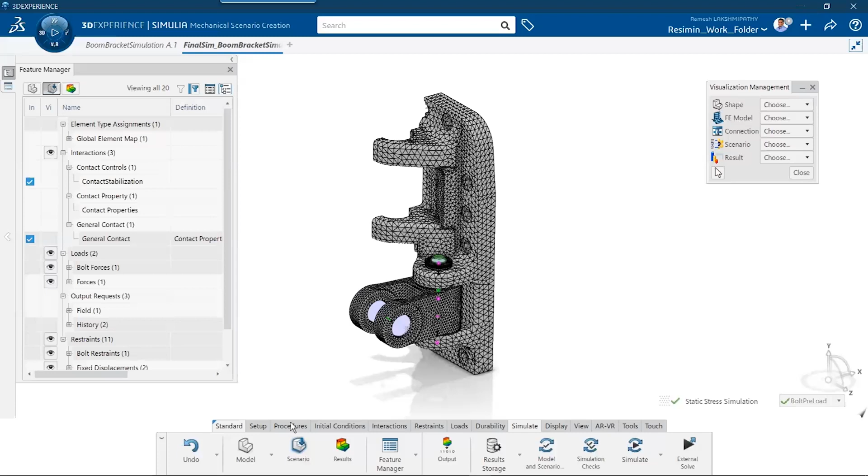Really, really easy to set this up, take advantage of symmetry. This is a multiple procedure analysis, a 2-step analysis. The first step, we're applying that bolt preload. And then the second step, we're just restraining the bolt, keeping that preload applied. And there are different boundary conditions here, there are some hinges.

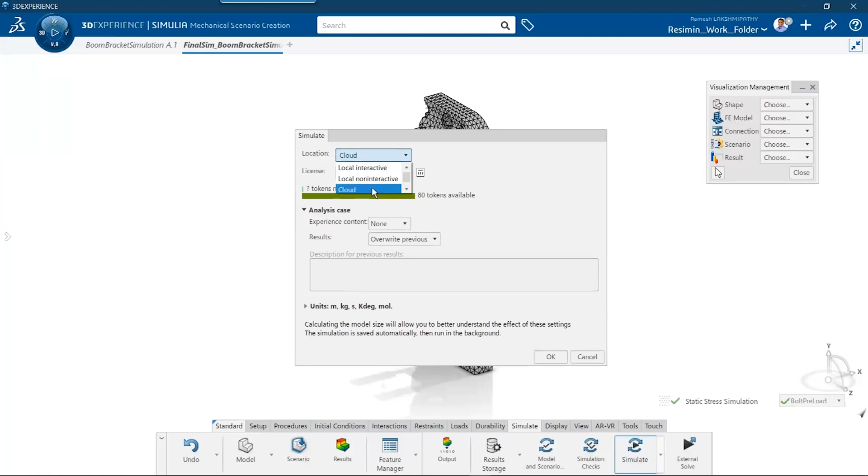So we're going to run this analysis. Again, you can run on the cloud, run it locally. And then after we run the analysis, I don't know if anybody's done fatigue analysis before, but the way a fatigue analysis is typically done is you run a structural analysis first, and then the results of that structural analysis feed into your fatigue analysis to give the stress limits, kind of the S in the SN curve that this model is going to be subject to cyclic loading on.

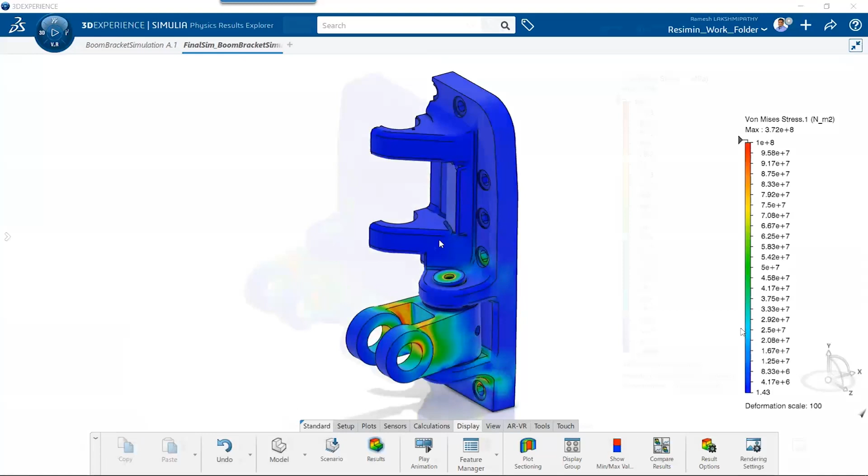So this is the results of the structural analysis. Let's kind of walk through this a little bit. Force. So you can see this is showing us the von Mises stress.

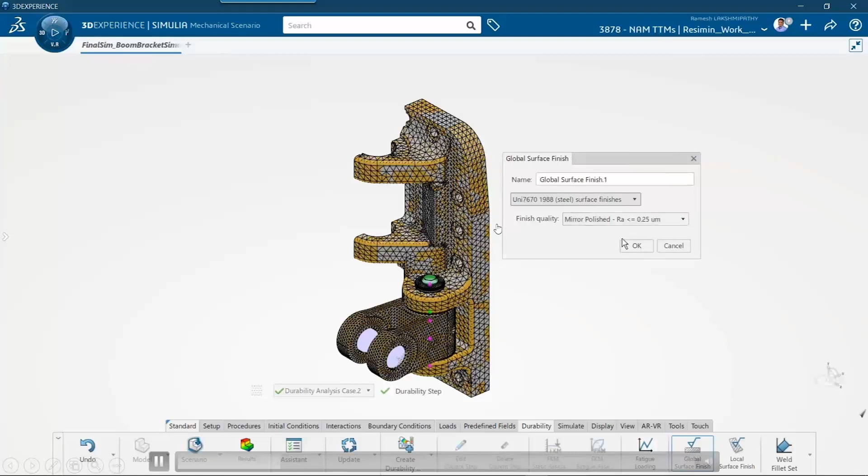Again, when we run fatigue analysis, another nice thing is you can actually specify a global surface finish. If you're running fatigue, surface finish is something that's very important. So you could specify the default surface condition for all of the faces, and then if you wanted to override it at any specific locations, you can do that.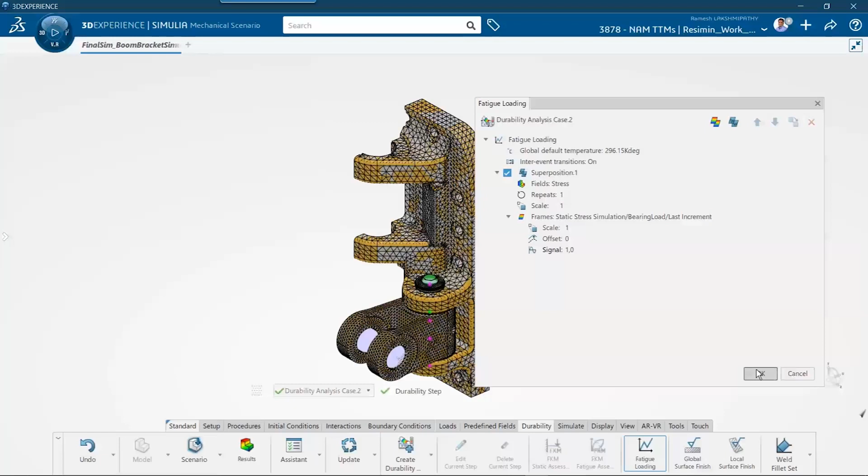Now, when you run a fatigue analysis, typically what you do is you point to a parent structural analysis. So what I'm going to do is add a frame that points to the last increment of the second step of the structural analysis, the last increment of that bearing load. You can specify it goes from 0 to 1, basically saying the loading goes from 0 to whatever the maximum positive value of stress is, so that's 0 to 1. You could also do negative maximum value to positive maximum value. It just basically defines the stress range that's being looked at in your fatigue analysis.

Fatigue analysis typically runs very, very quick. And again, we do have a predefined library of material properties for fatigue, so we could go ahead and run the durability analysis.

The result we're typically interested in when we run durability analysis is the log of life. What log of life gives us is whatever the minimum value is. This means the model can withstand 10 to the power of 4.59 cycles at wherever the minimum is.

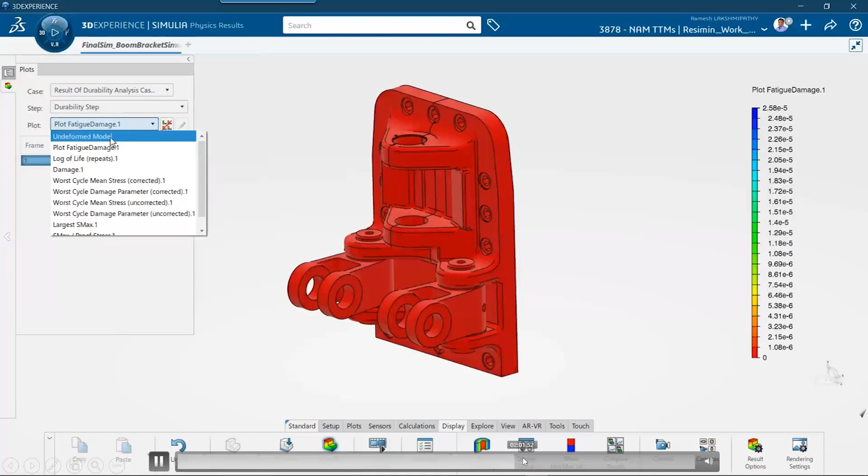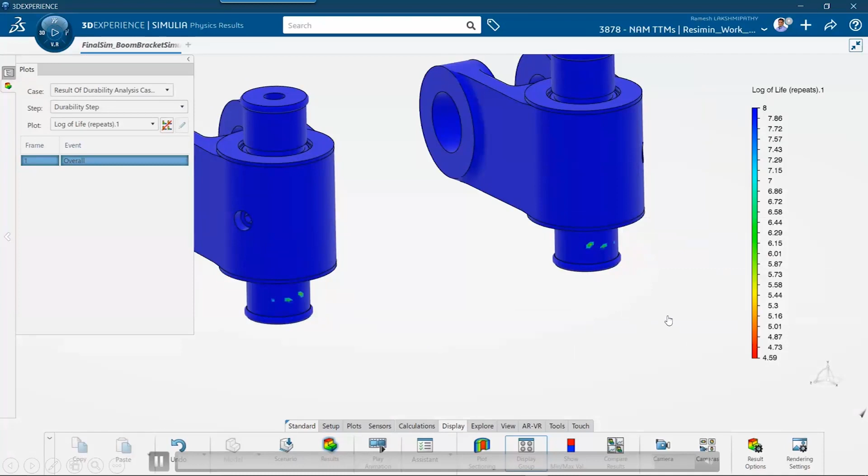So if we zoom in here, we can see the minimum actually is here at the washer, I believe. So we can determine, based on however long we want this thing to be able to last, and how many cycles this thing is going to see per year or per use, whether 10 to the power of 4.59 is adequate for this particular design.

All right, so that was just comparing the initial and final designs for the simple analysis as well as the final analysis. And this is actually a typo, it should be to the 4.59.

So now let's look at, those were things they felt like they could do with SolidWorks simulation. Although for this engineering level simulation, they really felt like they were not doing a good job, and they wanted to utilize a tool, a more advanced or more well-respected tool for those types of analyses, which obviously Abaqus is a world-renowned and world-respected tool.

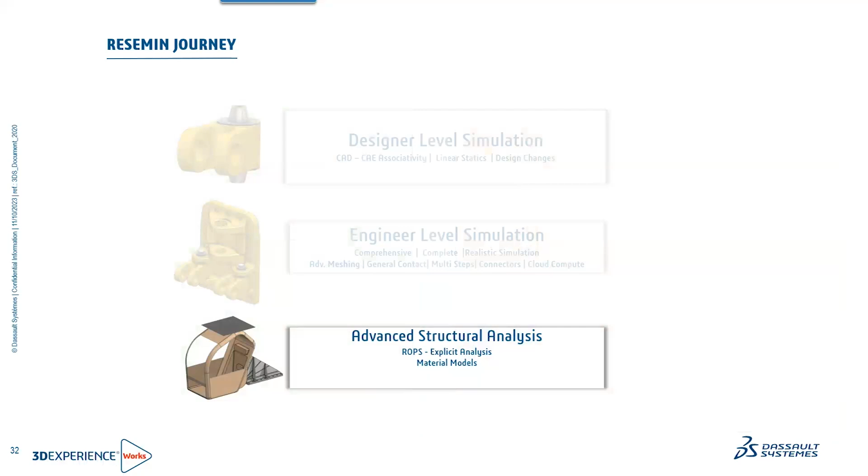So now they wanted to run the advanced analysis. Here's a look at what the falling object protection looks like. For this particular industry specification, they had 227 kilograms that they wanted to drop 5 meters, and they were interested in the safety of the person in this place.

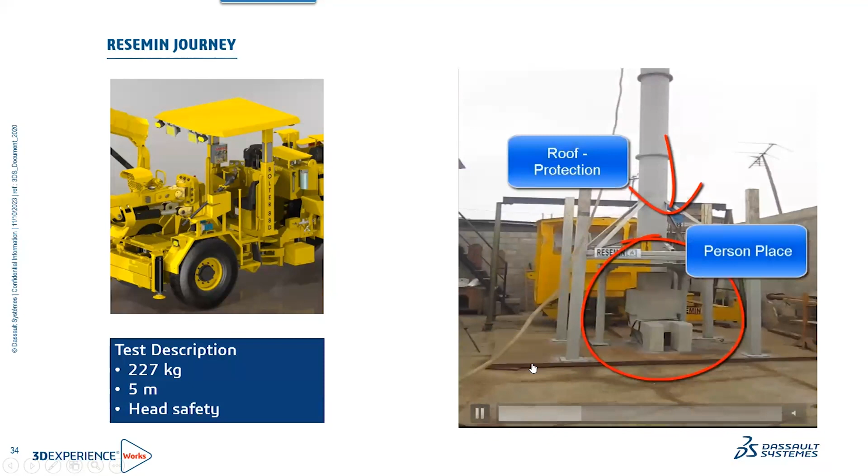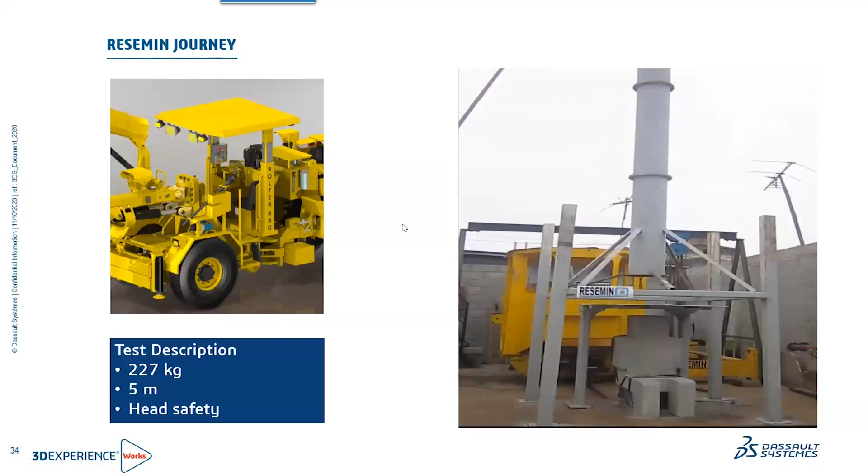Now, I don't know about you guys, but I would not want to be sitting in that place as they're running these tests. So let's take a look at this. So we can see what that looks like, right?

And the intent here, after they run the analysis, is they want to look at the amount of deflection they've gotten on that top canopy.

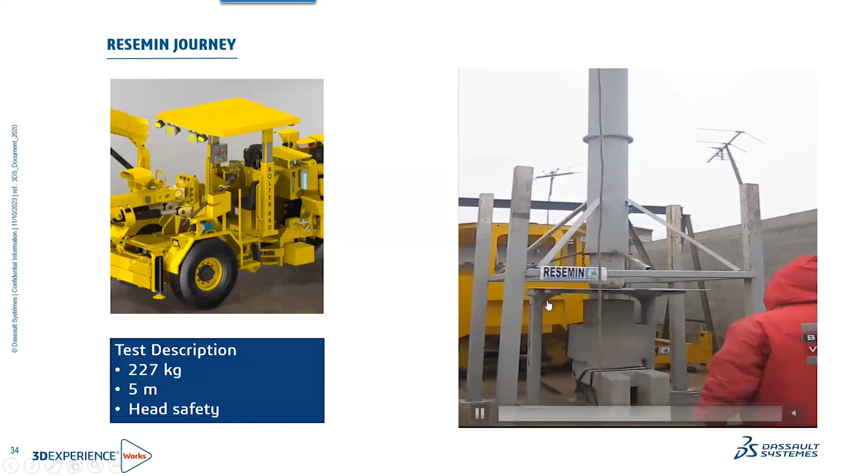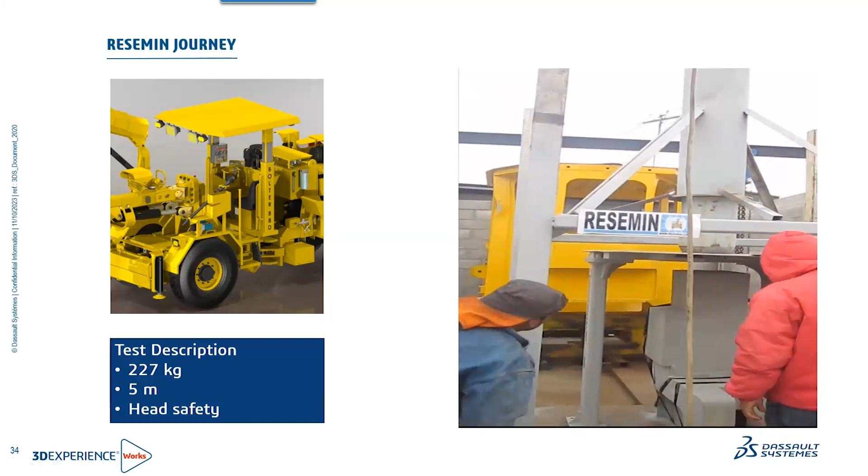So this is a simulation they were doing instead of one of three things: either building prototypes and physically testing it, which you guys can see is a long process. You certainly don't want to be doing that for every design. You only want to be doing it for designs you're pretty sure are going to meet your requirement.

Or they were trying to utilize that third-party tool, which they didn't have people they felt comfortable with, or they were consulting it out.

So we were able to show them how they could solve this using the explicit solver inside of the 3D Experience platform, and we were able to basically mimic what they were seeing in the field, to a very, very high percentage of accuracy, within a few percent.

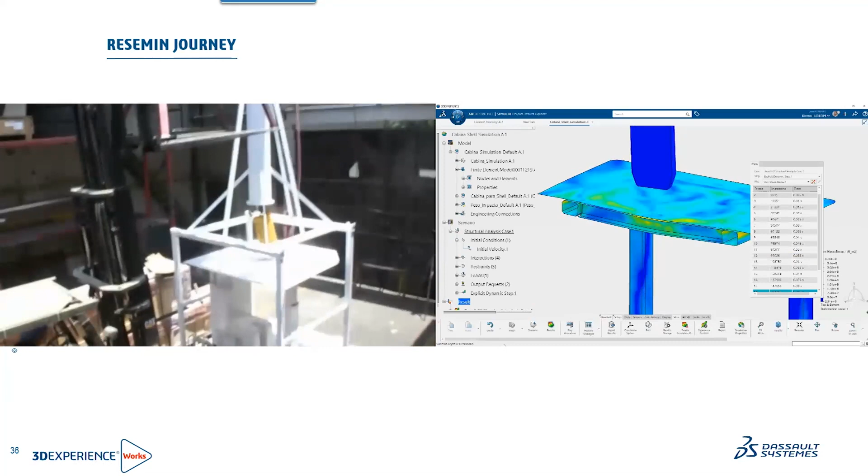And I'm not one of these analysts who says, oh, you can eliminate prototyping and physical testing. But I do think if instead of doing 10 prototypes a year, you can do 2 or 3 prototypes, you're saving a lot of money and a lot of time. So this is a real benefit for them.

So they also were interested in doing rollover protection, both for top loading and side loading. So that's what this looks like. Again, there are industry standards for that, both the falling object protection as well as that top loading that they were utilizing for these analyses.

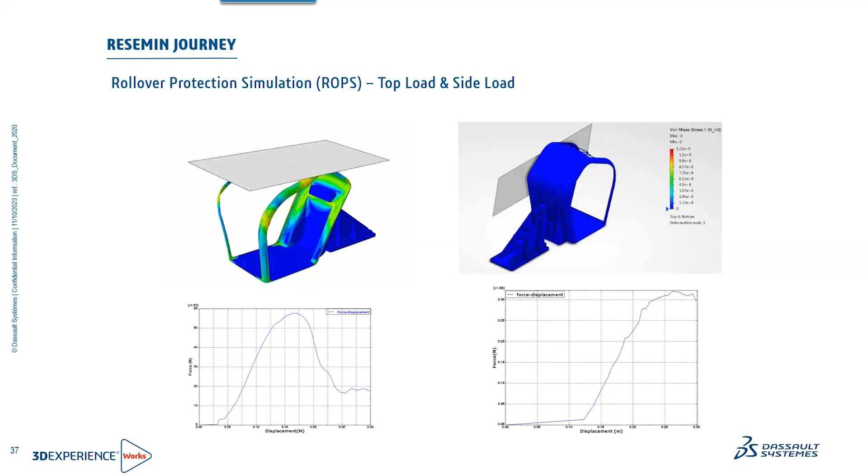I'm going to skip this here in the interest of time, so there are four on the structural side, and I'm going to focus on structural. If you guys want to do another session where we talk about EMAG or fluid dynamics, I can do it, or I can have one of my colleagues do it. If it's EMAG, it'll definitely be a colleague.

But on the structural side, we followed that same good, better, best methodology that we've used with SolidWorks, with standard, professional, premium offerings. So if you're just interested in doing a really simple first pass analysis, you've got structural designer, all the way up to durability and mechanics engineer, which is the top level package that can do explicit dynamics, damage modeling, and material calibration.

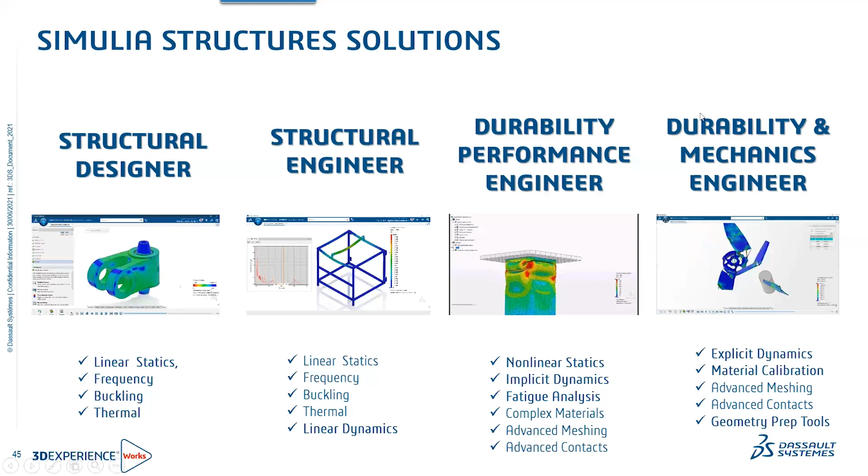I don't like talking about product names because I don't think it matters to our users. If you see something here you're interested in, talk to your reseller, feel free to reach out to me, and depending on the analysis you're trying to do, we can figure out which package makes the most sense. You don't care what the names of our products are, right? Who cares, as long as it solves the problem you're interested in. So that's where I'll wrap up.